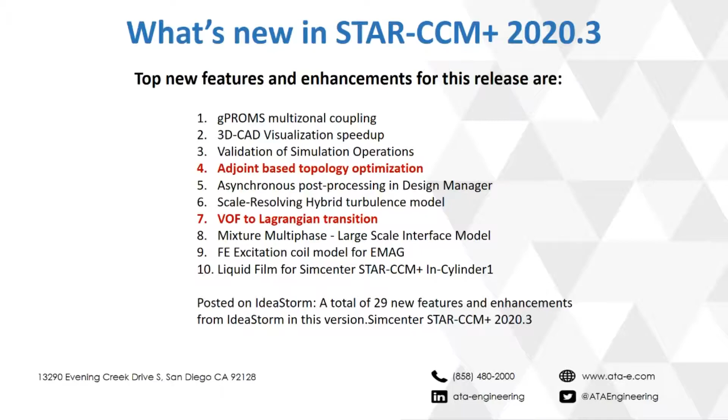But just generally speaking, the Siemens philosophy with STAR-CCM Plus releases is to look at various facets of where it needs to be improved. They focus on, in this release, and this is fairly standard, 4 key areas. One is focusing on the complexity of not only customer products, but also the physics and getting it right for those products.

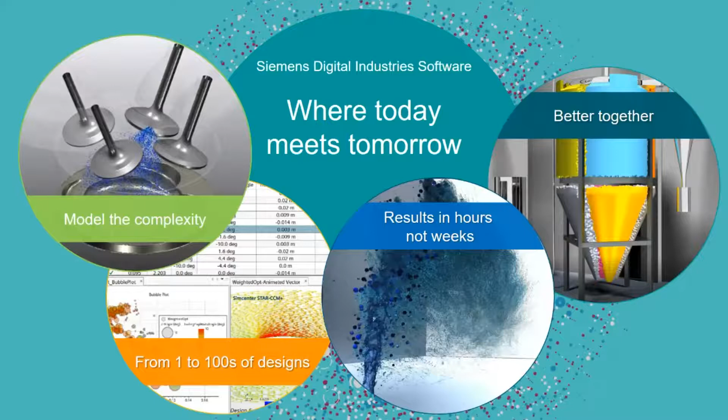A lot of today's examples are going to show you that application to complex physics. Secondly, they want to automate the process so that instead of doing one simulation, you can do hundreds. That comes from the interface making it easy to do parametric sweeps to exploration of a design space, right the way through to cloud computing. All of those things make it go much faster.

That's a key vision of Siemens and ATA to support that. And then next, results in hours and not weeks. When you apply more physics to a problem, often you add more complexity and often a lot more time to run things. Sometimes multi-phase problems can take a lot longer, but a lot of the added features, particularly this year in STAR-CCM Plus with AMR to reduce cell counts, even in multi-phase problems, really has made things go much faster, and they continue to focus on that.

And then lastly, the better together mantra is really the idea that Siemens has a huge portfolio of tools in the Simcenter portfolio, and getting STAR to talk to them all very well is an important part of the development process, and that continues to evolve. Every release, it has better connectivity to the other tools in the portfolio.

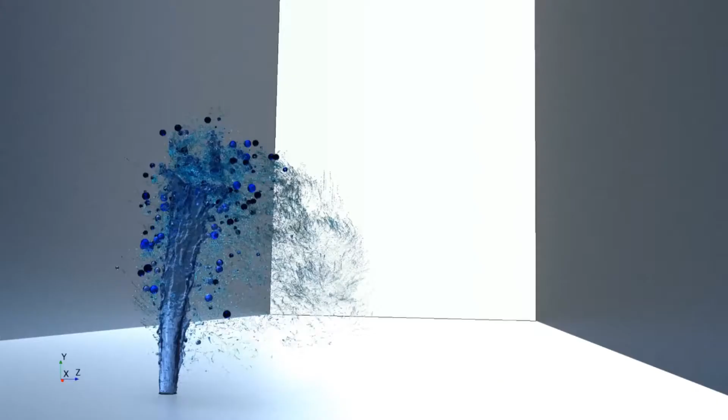So this next, we actually have a video here, which was recorded by Daryl Schneider, and it really captures 3 minutes of lots of information about the latest release. I'm just going to quickly play this, and then we'll come back to Chris.

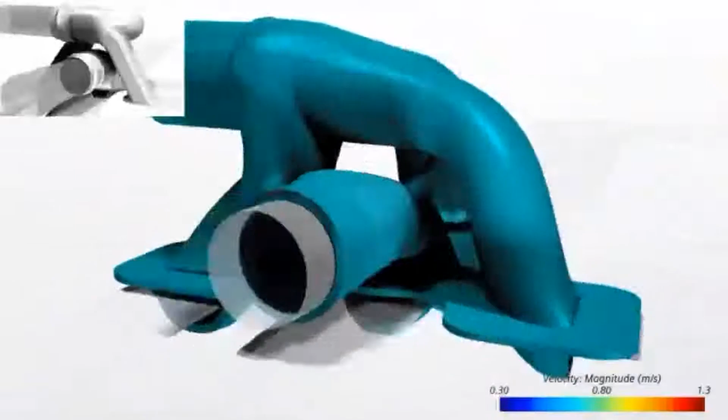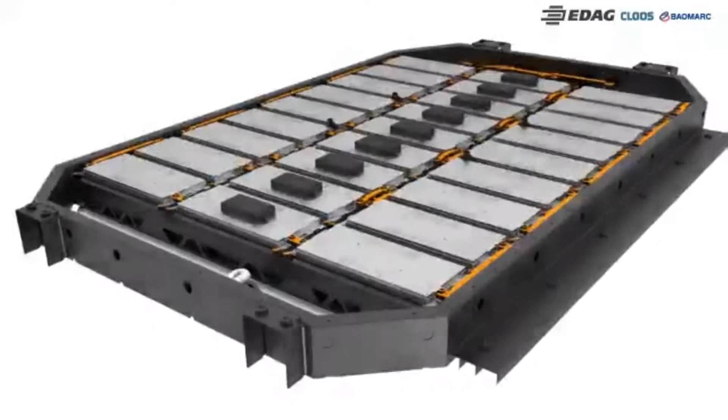Siemens Digital Industries Software provides increased simulation realism with Simcenter STAR-CCM Plus 2020.3, enabling you to accurately model the complexity of today's products and deliver real innovation. Adjoint-based flow topology optimization is an exciting new way to find ideal designs. With an inbuilt constrained optimization method and an end-to-end workflow, you can now leverage this cutting-edge technology to generate highly efficient and often non-intuitive solutions to your design challenges.

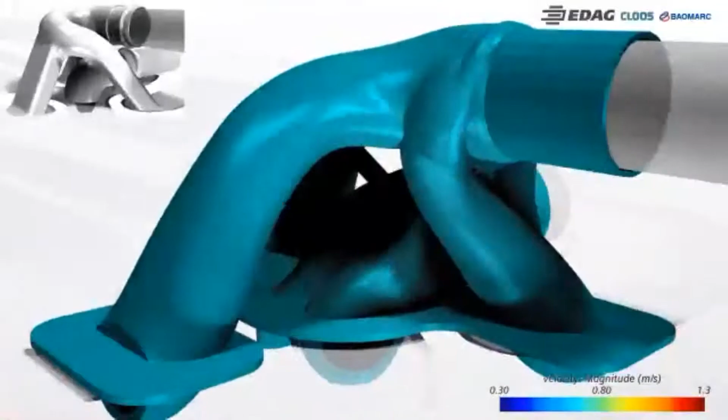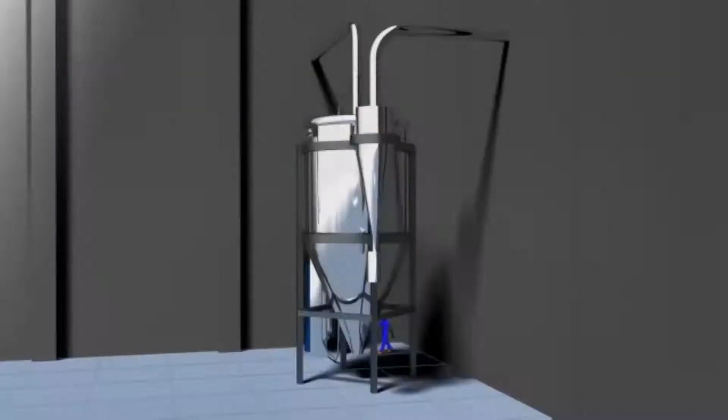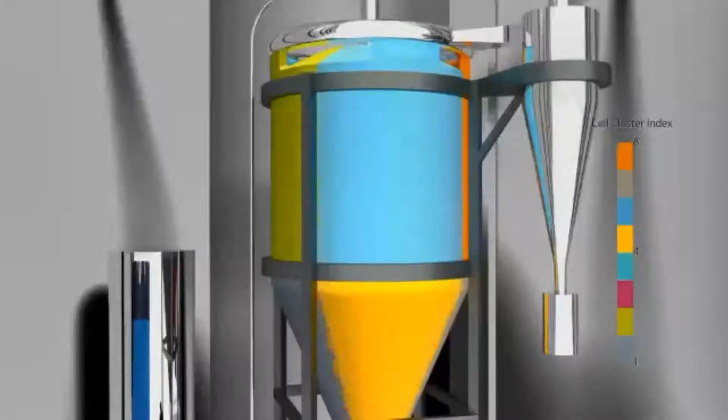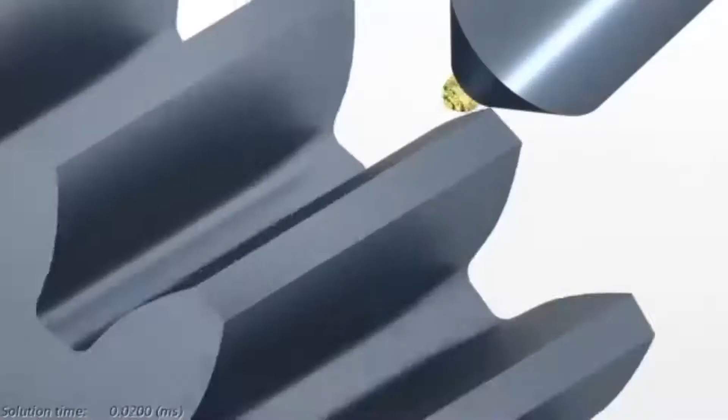Improving chemical processes like spray drying or mixing requires accurate modeling of complex physics and chemistry. GPROMS is a powerful modeling environment to simulate such processes. You can now easily use CFD simulations from Simcenter STAR-CCM Plus to calibrate a multi-zonal GPROMS model, improving accuracy and eliminating uncertainty. We've introduced an exciting new hybrid multi-phase capability to more efficiently simulate liquid flows in applications where flow breakup is present, such as vehicle water management or spray cooling. The VOF to Lagrangian transition model resolves the formation of droplets using a volume of fluid approach. To track these droplets, the model automatically switches to a Lagrangian method, significantly reducing computational expense and simulation turnaround time.

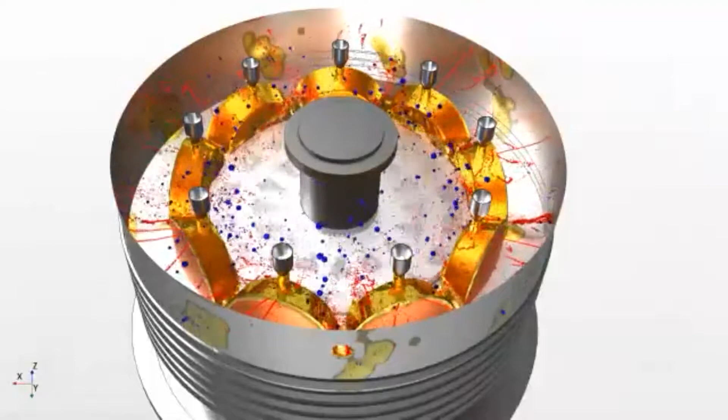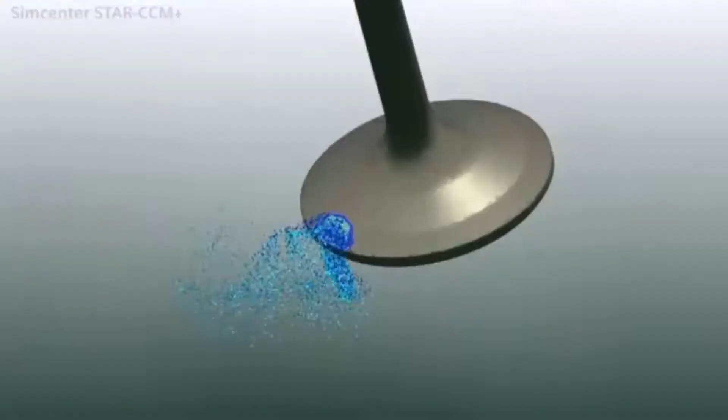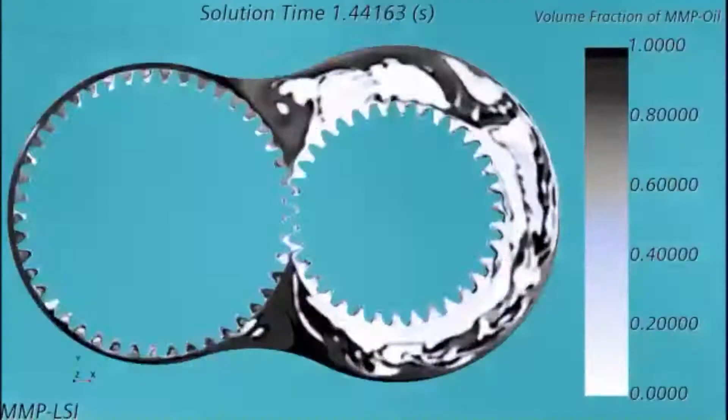High fuel loading in internal combustion engines may cause undesired liquid films to form on surfaces. You can now model this phenomenon with Simcenter STAR-CCM Plus in-cylinder solution. This means better understanding of the performance impacts of high fuel loading, including emissions and pool fires, and in the end leads to better combustion system design. Simcenter STAR-CCM Plus 2020.3 also introduces the mixture multi-phase large-scale interface model, a new approach to simulate free surface flows with droplets or bubbles for applications like gear lubrication. This approach removes the need to resolve all relevant scales in the mesh, bringing faster and more accurate answers.

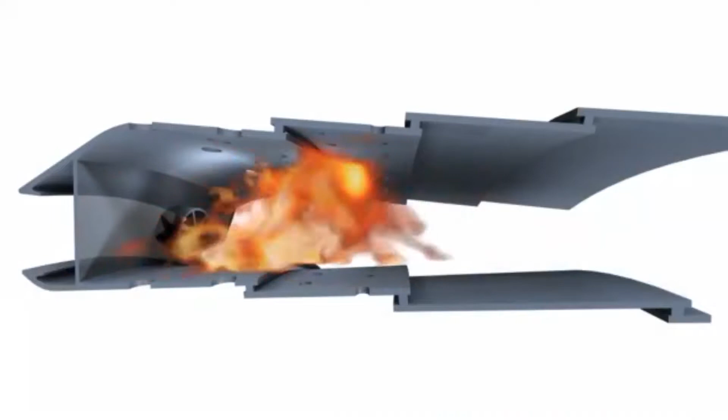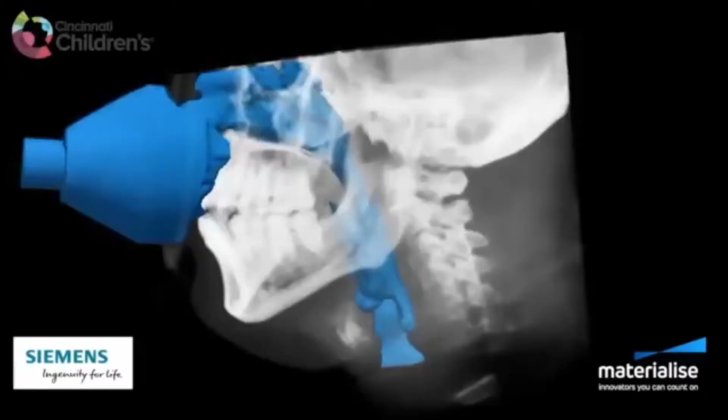The new scale-resolving hybrid turbulence model helps capture more small-scale turbulent structures in an unsteady RANS simulation. This means, for example, increased fidelity of your transient aerodynamics simulations without additional computational cost. Simcenter STAR-CCM Plus 2020.3 makes it even easier to solve your complex design challenges and engineer real innovation into your products. For more information, visit our product website.

But with that, I am going to just summarize where we are in terms of the two things for today. Basically, we're going to look at Adjoint topology-based optimization and the VOF to Lagrangian transition. Chris has been working on a couple of projects for both of those topics. So with that, I'm going to pass the ball to Chris.

All right, thank you, Adam. I'll just get my screen set up. Can everybody see my slides? Yep. Great. Okay. Well, thank you.

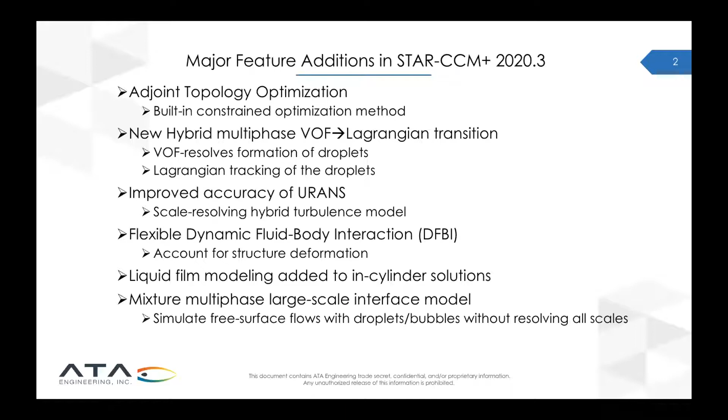My name is Chris Stoyich, and I'm just going to talk a little bit more in depth about what Adam had started presenting. As Adam mentioned, there were several major new feature additions in STAR-CCM 2020.3, and this is a short list of those, and I'll be talking about an even shorter list.

The adjoint topology optimization and the hybrid multiphase VOF to Lagrangian resolved transition model. I won't go into the rest of these because I think you got an idea of what they are based on Adam's presentation earlier. But if you are interested, the full list is available on the support center at this link here. You can just actually search for feature additions in STAR-CCM 2020.3 and it'll pop up.

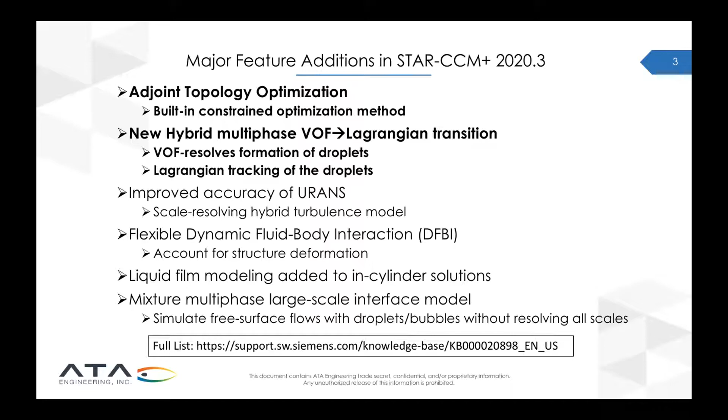So I'll first talk about the adjoint topology optimization. Topology optimization methods generate geometry to maximize some engineering objective. In this case, it places solid material into the flow domain to create the flow path geometry that produces the desired result. The adjoint topology optimization method uses adjoint-based gradients to drive towards an optimal solution.

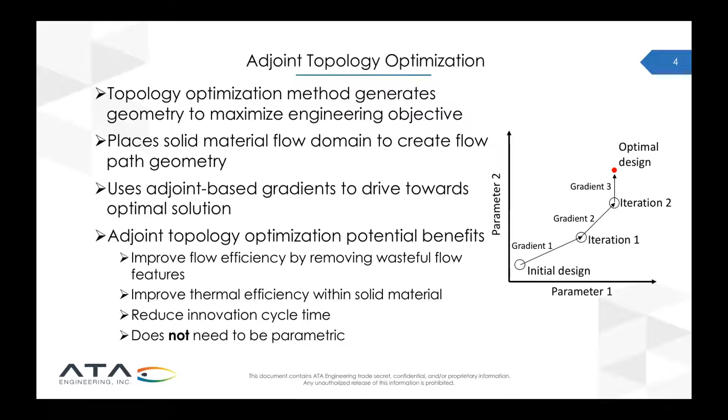Combustion efficiency increases with the level of mixing between the fuel and the oxidizer. The fuel path geometry of this flow path can dictate the flow condition at this fuel orifice here where it exits. A more turbulent flow can enhance mixing and therefore can increase combustion efficiency.

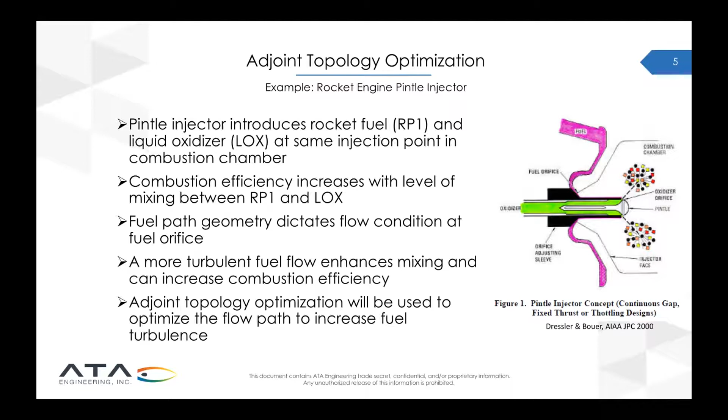The objective is maximizing the turbulent kinetic energy at this exit plane where it would combine with the LOX. The models we're using are the steady coupled flow solver using the Menter SST turbulence model, the Adjoint solver, topology optimization, and we're also using AMR to resolve the interface between the flow path and the boundaries that are being optimized.

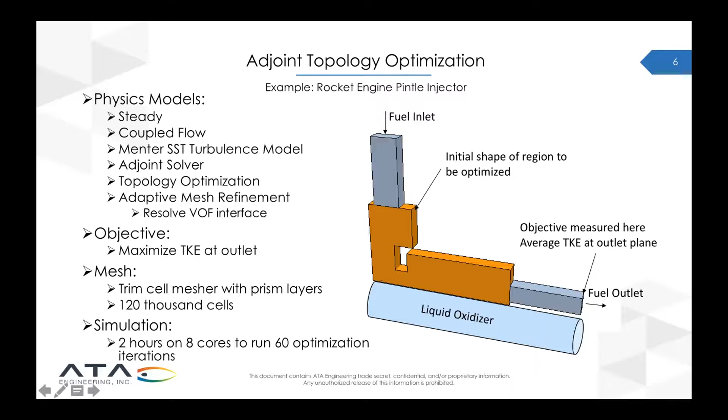The mesh is small, 120,000 cells, and I was able to run this very quickly, 2 hours on my local computer on 8 cores, to run 60 of these optimization iterations. In the next slide, I'll show you a video of what that optimization cycle looked like.

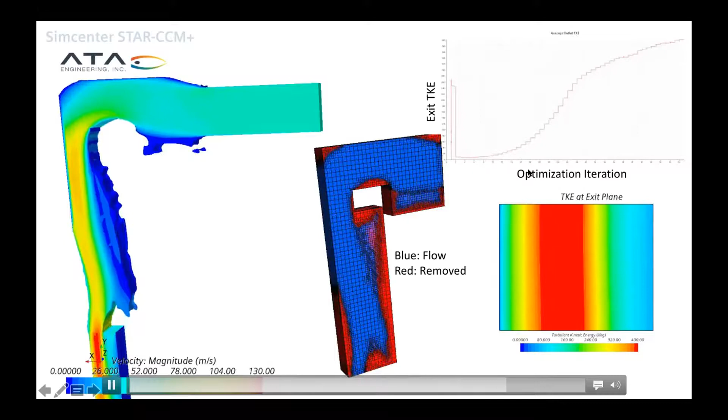On the left is the updated geometry, a representation of where material is being removed to form that flow path. On the upper right is a plot of the turbulent kinetic energy at the exit plane as a function of the optimization design iteration. And on the lower right is a contour plot of the turbulent kinetic energy contours at the exit plane.

After 60 iterations, we reached an objective asymptote where further changes didn't improve the design too much. In our final design, as compared with the original, excess volume was removed from the flow path, and the turbulent kinetic energy at the exit was maximized.

This is kind of a funny shape that was spit out the other end of this optimizer, and a manufacturing engineer would say, hey, how do you manufacture this? But with additive manufacturing, this can actually be manufactured as is. This is an interesting example to look at because of the increased use of AM in rocket engine development. Otherwise, an engineer could use this as a guide to offer suggestions for a similar design that could be manufactured using conventional approaches. So, are there any questions?

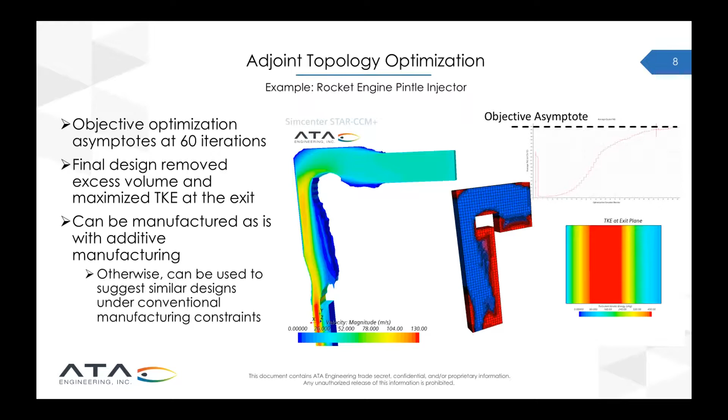Cool, thank you. Thanks, Chris. All right, well, thank you guys.

This is good for flows of immiscible fluids and free surfaces. As Adam showed in his video that he played, it's used heavily in the marine industry, where you've got some boat floating on top of the surface of the water.

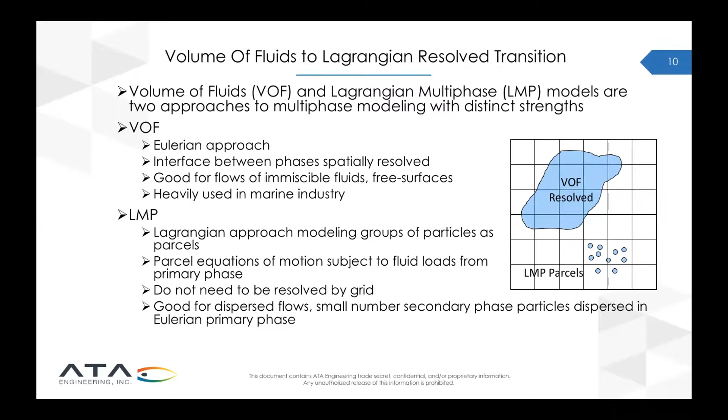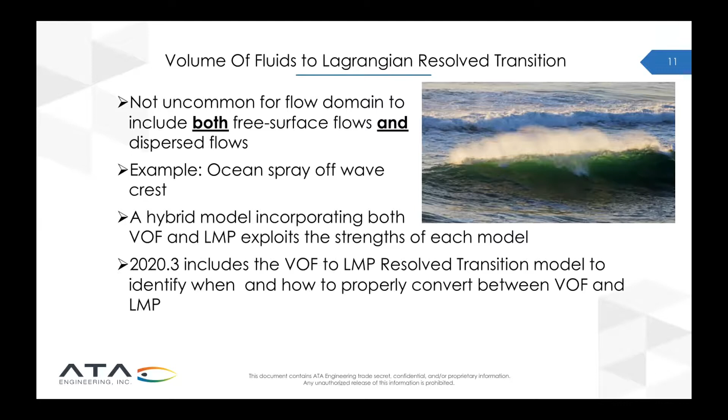So if we could use a hybrid model incorporating both the volume of fluids and Lagrangian approaches, that exploits the strengths of each model. STAR-CCM Plus 2020.3 includes a transition model called the VOF to LMP resolved transition model to identify when and how to properly convert between VOF and LMP.

Basically what this transition model does is track the size of fluid blobs in the volume of fluids model. When the blob diameter drops below some threshold, the blob is marked for Lagrangian transition. I'm showing on the right here with that droplet picture, we've got some portion of that flow suitable for VOF, but then we've got these blobs coming off the top, and those would be candidates for Lagrangian transition.

In the case where the blob volume ratio is close to 1, the resulting droplet has roughly the same size and velocity as the blob. So you'd have this VOF blob, which would be converted straight into a Lagrangian droplet that would be very similar to it in terms of velocity and shape.

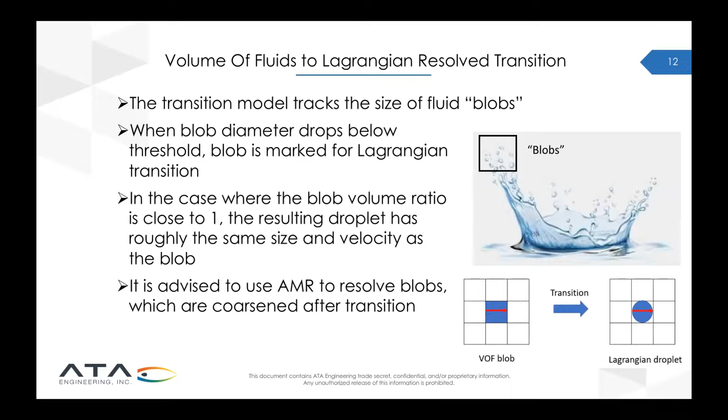Additionally, when using this, it's advised to use AMR to resolve the VOF surface and the blobs during the portion where they're being tracked. Then, as they transition to a Lagrangian droplet, the additional mesh thrown at the blobs to resolve them is coarsened.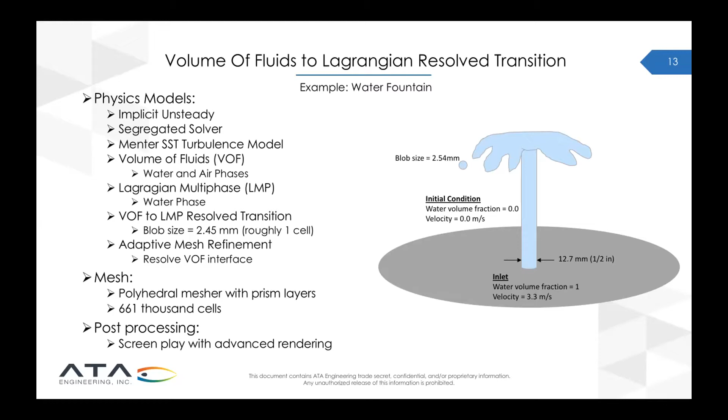Again, as I mentioned in the previous slide, I'm using AMR. The mesh is still not that big, 661,000 cells. And then, as you'll see in the next slide, I also had some fun with screenplay and advanced rendering in the post-processing to make this look more impressive.

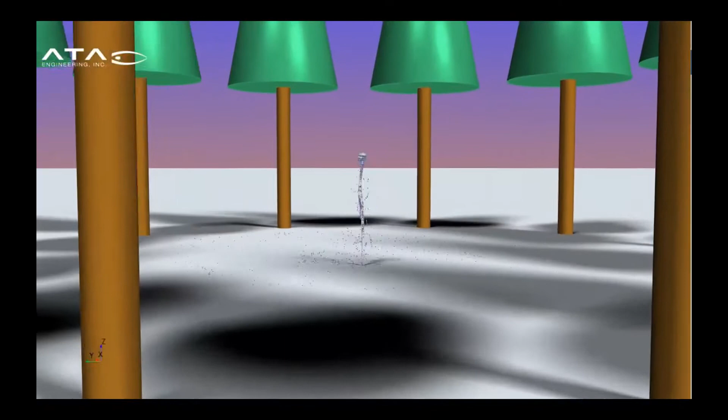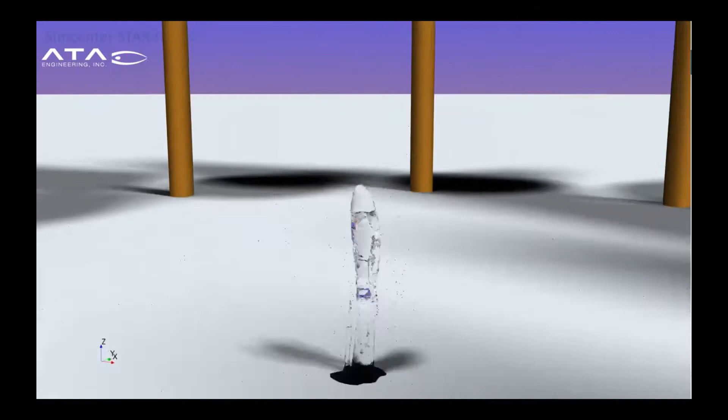So here we go. We've got this nice little grove of trees growing around this magical kind of spring here, and you can see we've got this water fountain shooting up. There's some instability, but as it breaks apart at the top, you can see the Lagrangian particles falling off of it.

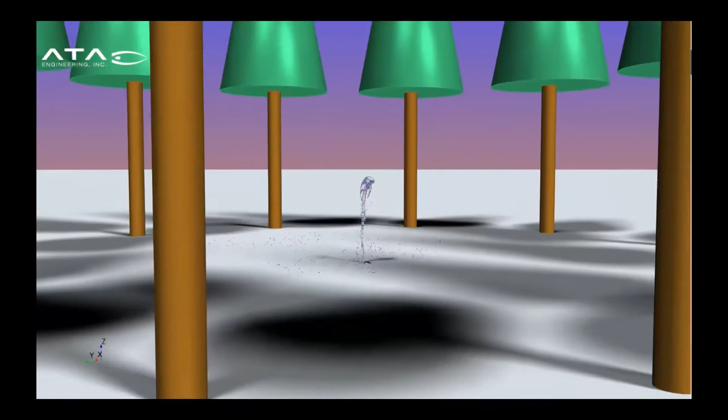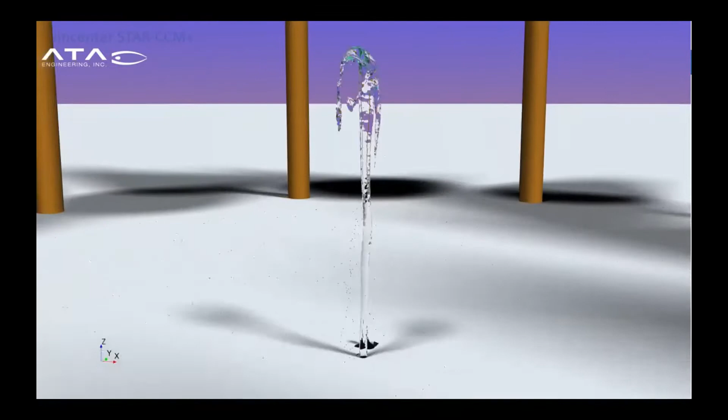One kind of modeling mistake that I made is the particles just seem to be bouncing along the ground, and that is clearly not what water droplets would do. That was a boundary condition issue that I should have set on my part, saying that they would stick.

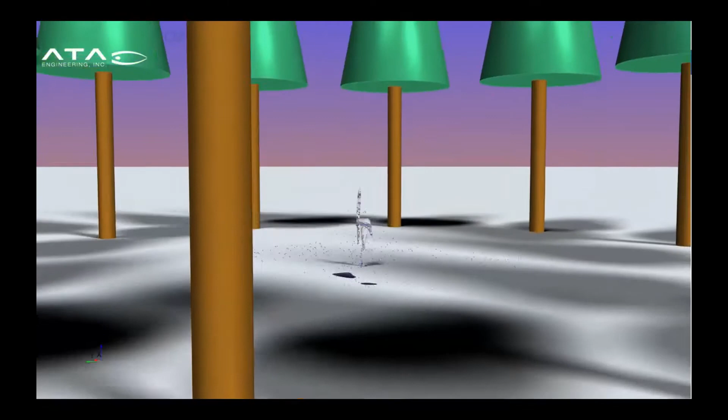Anyway, that's my last slide. I can leave this video up because I think it's fun to watch, but I can take any questions if anybody has any.

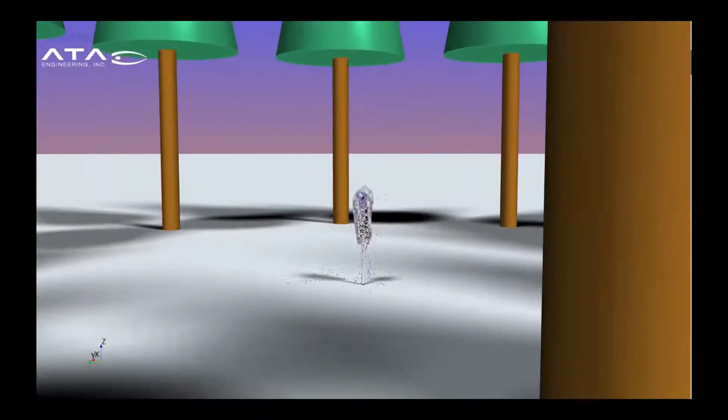Chris, this is Adam again. When you've got the particles, when they become a Lagrangian particle, like in this case, if they hit the floor and puddled, could they go back the other way? Could they go back to a VOF model?

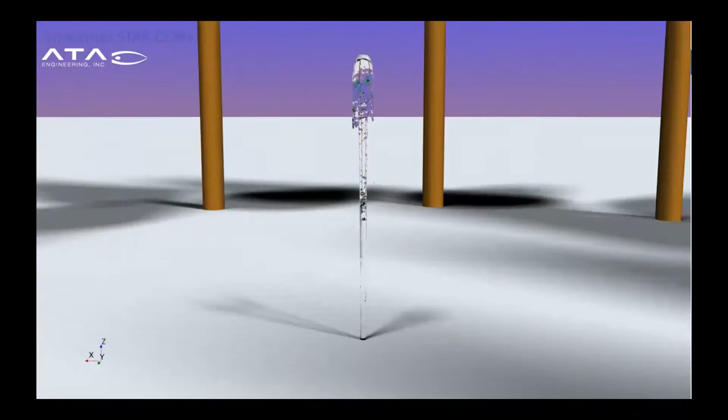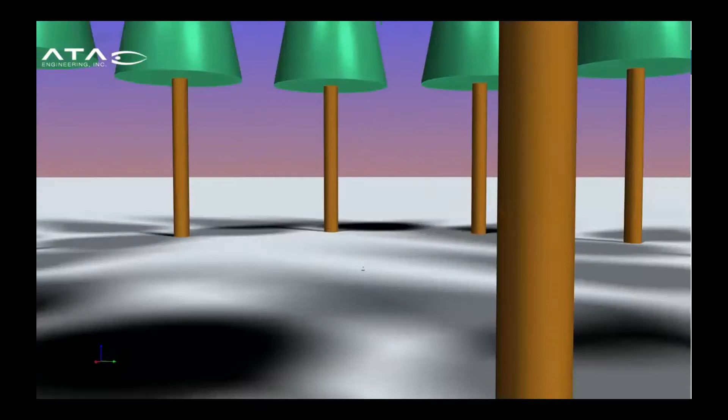Yes, they can. You can also have them go into maybe a fluid film model, if that might be more appropriate, because unless they were pooling in some sort of divot that had a large amount of thickness, maybe a more appropriate way would be just to have a little thin puddle represented by the fluid film model. So this could be used for kind of a spray painting model.

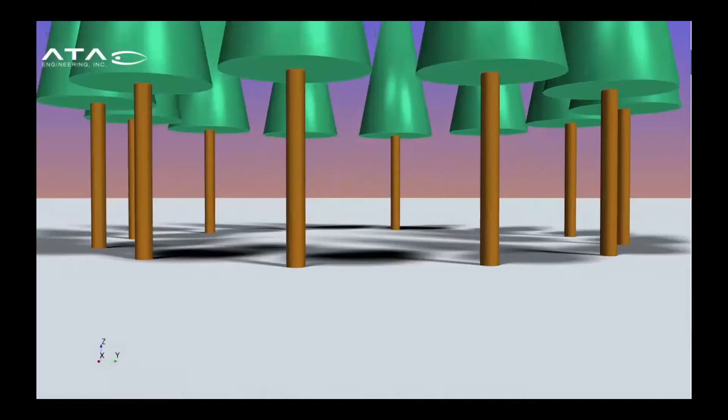In a previous simulation I've seen, I'm not an expert on spray painting, but I think the spray paint is kind of atomized as it's exiting the nozzle. So it'd already be, I don't think there would ever be a time where it'd be appropriate to use volume of fluid. I think it would be just directly to Lagrangian, just particles out of the gate.

Yeah. Thank you. You're welcome.